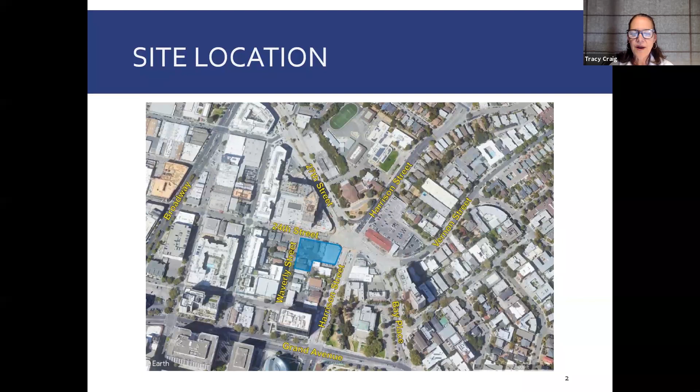Site location - I think everybody knows where the site is, at 24th, Waverly and Harrison in Oakland.

Property redevelopment - important to note that Nash Holland did not contaminate this site, but they are cleaning it up to support redevelopment. They're voluntarily addressing contamination under the oversight of Alameda County Department of Environmental Health, and that work will be done concurrent with the property redevelopment work. Alameda County Department of Environmental Health is our county agency, responsible for overseeing the cleanup of contaminated sites.

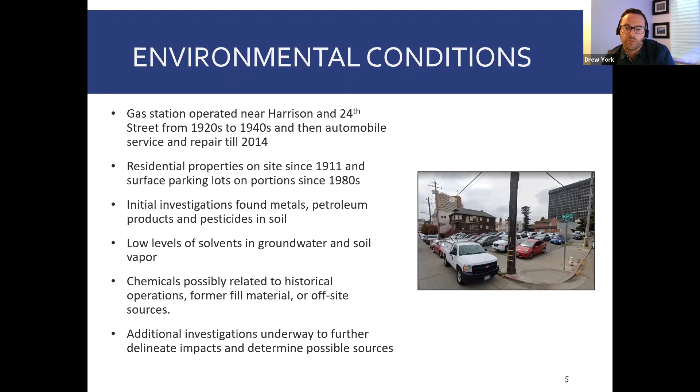So the draft corrective action plan, the CAP, is in the process of being developed. Holland is going to submit that draft CAP for our review and approval. The draft CAP summarizes all the historical and recently collected data results in comprehensive tables and associated plan and cross-section figures showing the locations of the impacts.

The draft CAP will also propose potential remedial actions for soil and groundwater, as well as corrective actions such as vapor mitigation engineering controls to address impacts in soil vapor.

Holland anticipates submitting the draft for our review in May or June of 2021, next month or the following month. Once we initially review it, it will be available for public comment for 30 days, and we'll give them the go-ahead to start that period. Once the 30-day public comment period ends, we'll incorporate any comments received into our final comments.

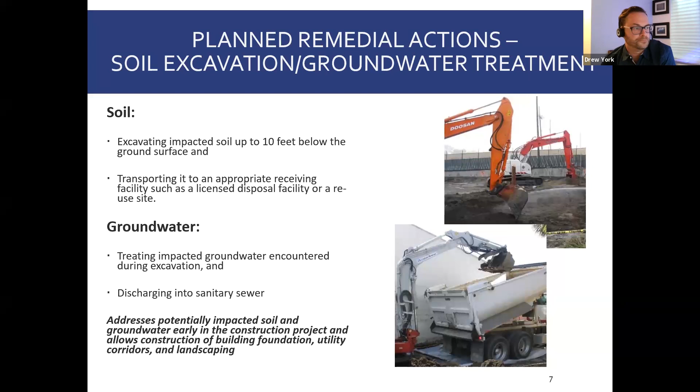There are also spray-on applications. It may include a passive or active sub-slab ventilation system, which would be essentially pipes that go underneath the foundation with holes in them that capture potentially contaminated soil vapor and get it away from the building, to mitigate the risk of vapor intrusion.

And then for potential offsite impacts, you have trench dams, and those are to block potential vapors that are traveling along utility corridors that could be entering the site.

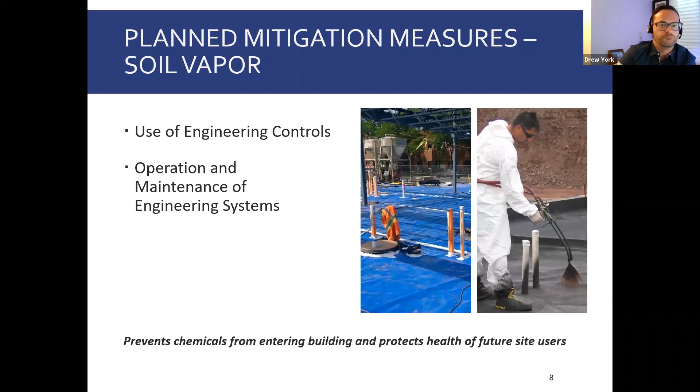So what about protection of the community? What are the exposure pathways? Well, there are a couple of receptors that could be potentially exposed: construction workers who are working within the contaminated area, and potential offsite receptors.

And how could they be exposed? Well, they could have ingestion, dermal contact, or inhalation of particles, and that would be dust kicking up from the big yellow equipment that's rolling around the site.

So basically, we require pretty strict requirements and protection measures, which we're going to talk about in the next slide, which will be implemented by Holland and their environmental consultant during all remedial and corrective action phases at the site.

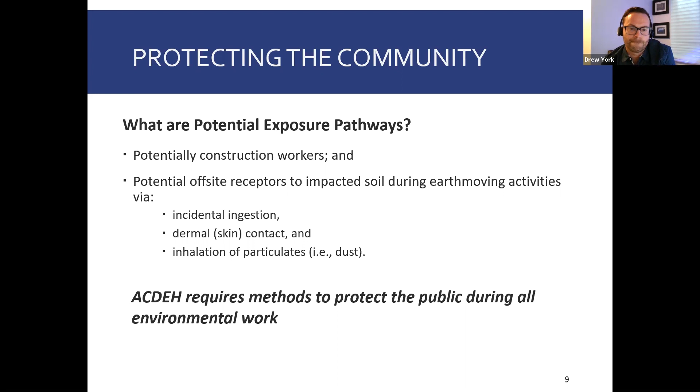So these are a few of the requirements that will be required once the CAP is being implemented. That's to ready the construction zone by either removing the contaminated source area, capping, or importing clean fill, to mitigate inhalation risk to construction workers and the surrounding community.

There's real-time continuous dust and air monitoring, which will have a full-time environmental professional on site during all work hours to monitor dust. Usually there are dust stations on all four corners of the site, at entrance and exit areas, as well as up gradient.

And if dust is visually seen, or sensors around the property detect dust above a certain threshold, usually PM 2.5 or PM 10, then construction activities are halted until additional dust mitigation measures are implemented.

The results of the air monitoring will be uploaded weekly to GeoTracker for the public to see. There will also be weekly status reports that follow those air monitoring data.

There's on-site dust management. You have dust suppression with the use of water trucks that spray water to mitigate dust going into the air. You have soil stockpile management, which is covering stockpiles with thick plastic and sandbags before the soil is characterized or removed off-site. If possible, we like to see direct load of impacted soil into a truck to minimize the amount of stockpiles on site.

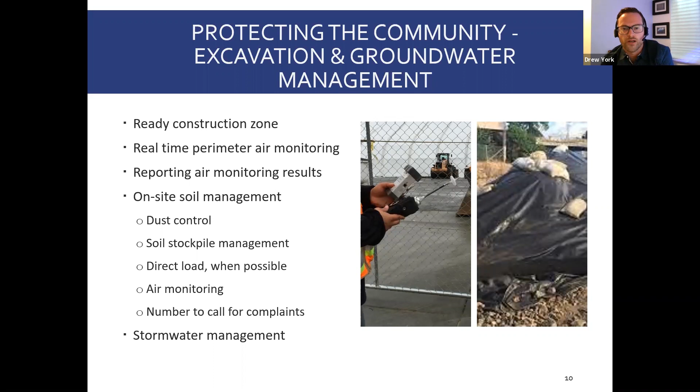You have equipment, personnel, and truck decontamination—we'll talk a little bit about that on the next slide. You'll have site security and fencing around the entire property, and an inspection of public off-site streets adjacent to the site, things of that nature. And then lastly, you'll have clearly visible placards referencing phone numbers of Nash Holland as well as us, who can be reached if a dust complaint is given. There's also usually a log of complaints that the construction company will have as well.

There's also the use of trained drivers who know the certain truck routes and how to enter and exit the site based on the city of Oakland's requirements. And then lastly, which we've run into through multiple community meetings, is construction worker parking—where the construction workers who are going to be working on site are going to park.

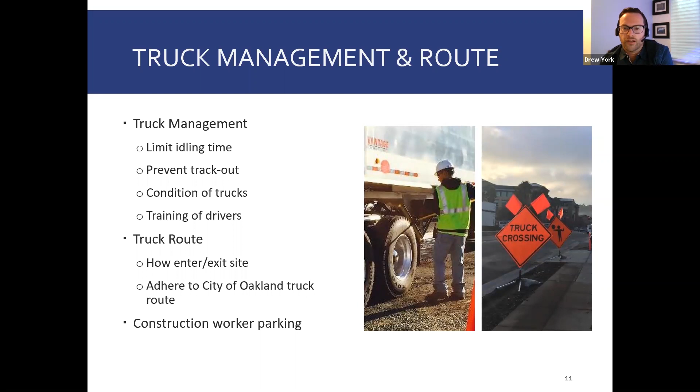And then you'll have communications. I briefly touched on this a couple slides before, but you'll have site signage with contact information—that'll have my information and Nash Holland's information on there. You'll also be able to view weekly status reports with the air monitoring results, as well as downloads of what's going on at the site and the timelines—if excavation was happening, how much excavation, how much soil was removed, and things of that nature. It's a good way to check up on the site, and those will be posted to the State Water Board's GeoTracker website.

For the schedule, as I mentioned, there's additional investigation work currently underway. Nash Holland is proposing to submit the draft cap for our review and approval in late May, early June. Once we initially comment on that, we will ask Nash Holland to open it up for public comment for a 30-day public comment period, which will be conducted in the summer of 2021.

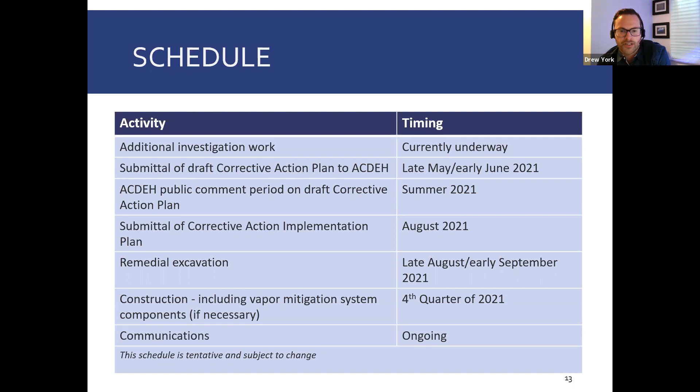We'll have a similar fact sheet distributed to the community letting them know they can comment for a 30-day period on the cap. The remedial excavation is slated to happen in late August and early September, and construction will start in fourth quarter 2021. Communications will be ongoing. In the next slide, I'll let Tracy talk on that.